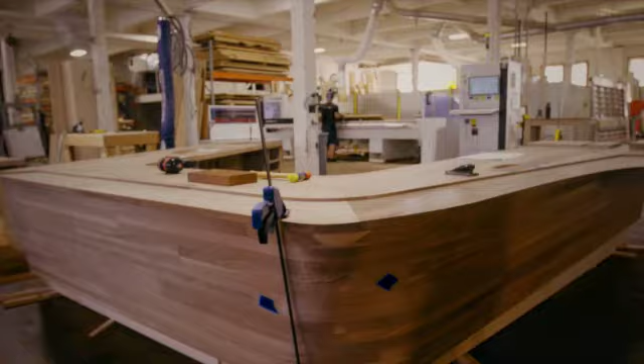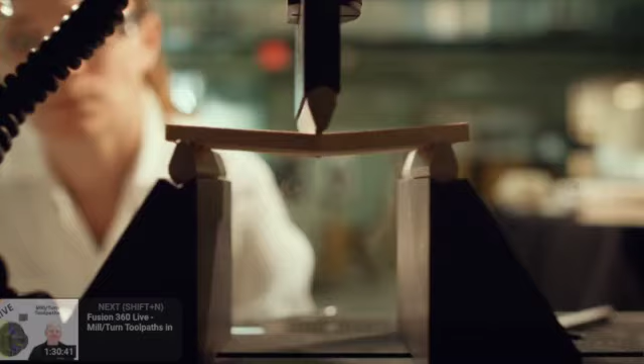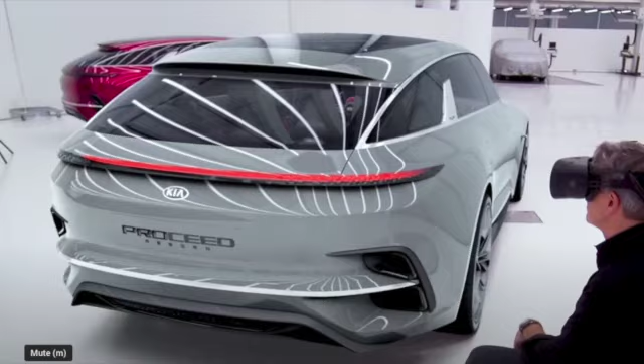This video is an overview, not a deep dive, of Fusion 360 tools, techniques and workflows you and your students can leverage to optimize their extended project work, to unleash their creativity and maximize their potential. This video assumes you've been a Fusion 360 user for a while and are confident using tools like Sketch, Extrude and even Render. If not, you are of course welcome to watch along, but there may be some foundations you need to shore up on before moving on.

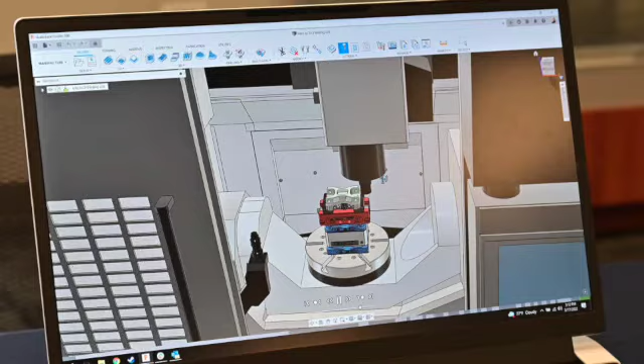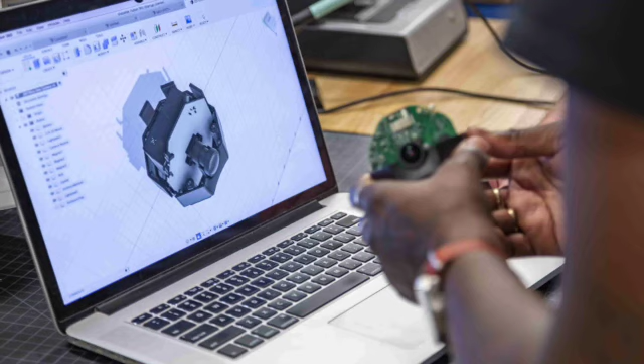While relatively new to business, students have always worked in a hybrid manner, splitting their time between home and school, network PCs and their personal devices. Fusion 360 is the first and only integrated CAD, CAM, CAE and PCB software platform of its kind. It's unique for educators because it connects the entire product development process into a single platform, meaning students don't need to download additional software and all the workflow they need is in one.

This video presumes you have experience of Fusion 360 and how to design parts, so let's do a deeper dive into the power of the platform to optimize and verify those parts so when students make them, they make them better.

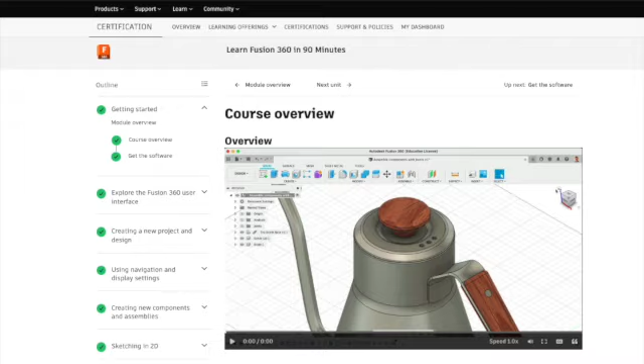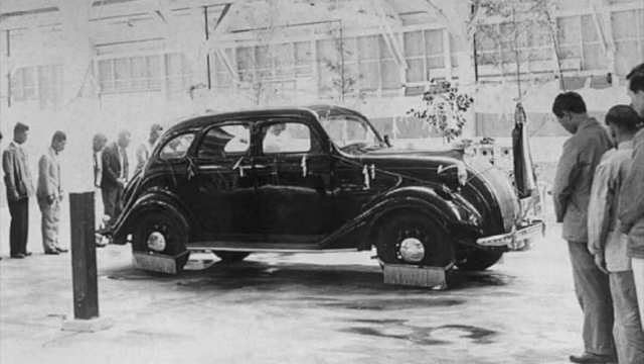So today we'll cover a 5-step approach to design using the lean manufacturing principle, which grew out of the famous Toyota production system. We can use Fusion 360 tools and workflows to reduce the wastage of time, materials and energy. The aim is for students to get it right first time. So let's dive into this example using this multi-tool design.

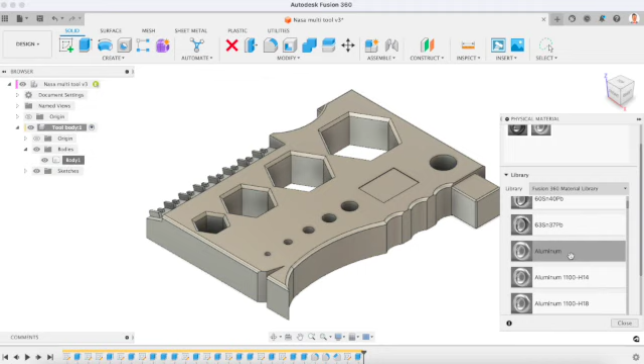First up, let's apply physical materials to a part and use the inspection tools to double check the part for dimensional accuracy, mass and balance properties. If those details are correct, we can export DXFs of sketches to print and cut out or even laser cut key 2D features. The aim is to physically prototype it fast.

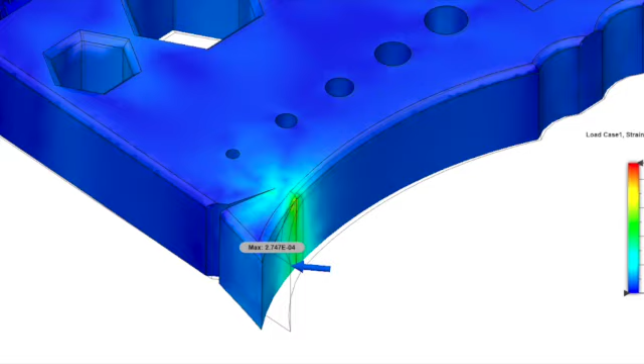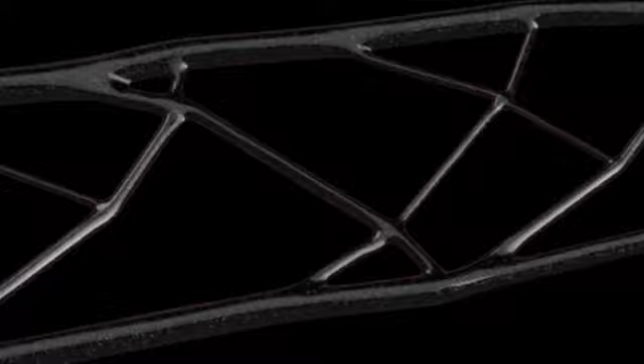If we are happy with the fit, we can simulate forces to explore how our part will respond under loading, and we can even use advanced tools like generative design and automated modelling as your personal design assistants. These advanced tools, however, require their own detailed workflows, so be sure to check out the links below.

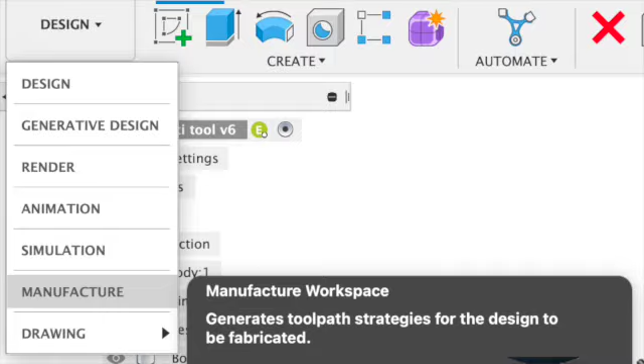At this stage, we should be pretty certain that the part we've designed is correct, so now we need to navigate moving from digital to 3D physical. To do this, we'll walk through, in much more detail, how to use the inbuilt additive manufacturing slicing capability found in the manufacturing tab. While 3D printing, or additive manufacturing, is a rapid prototyping technique, everything is relative. And if you have a class of 20 or more students wanting to fabricate every design, it can cause significant bottlenecks. So here's a workflow to tackle that issue.

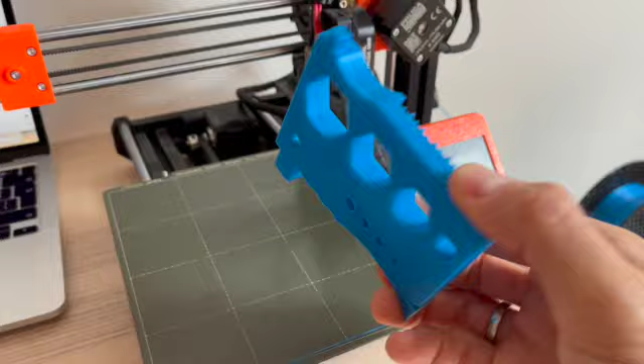Before I commit to 3D printing the whole multi-tool, there are 3 key features I want to isolate and test, as their dimensional accuracy and physical performance are vital. They are the polygon to hold the nut, the mini prying bar, and a precision measuring feature. You can see I've highlighted these in orange, and in this case they're all clustered towards the bottom of the part.

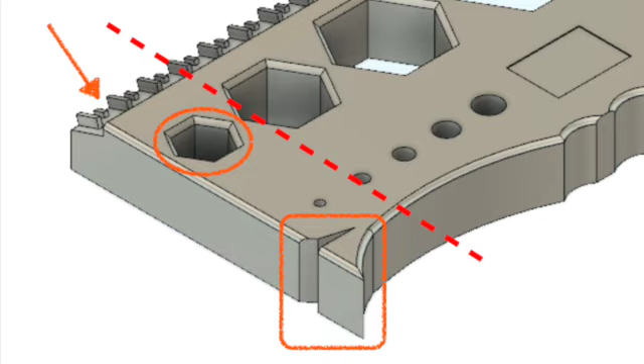To isolate them, I used the split body tool found in the modify menu. This creates a new body by dividing it through a plane, a face or a profile. Therefore, I created a new plane using an offset plane found in the construct menu. The result is that I now have 2 bodies.

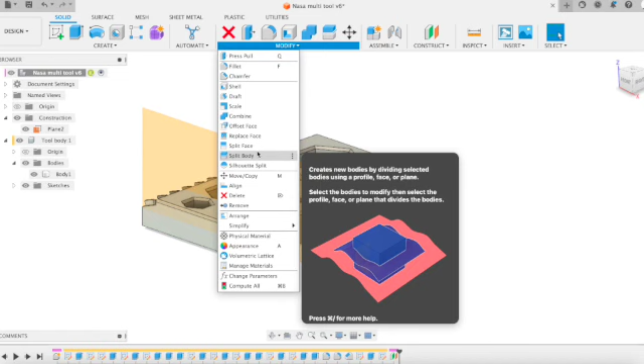I could of course make multiple splits to create many new features, each of which is something you need to test. But don't worry about ending up with lots of bodies. You can combine them again using the combine tool, which is also found in the modify menu.

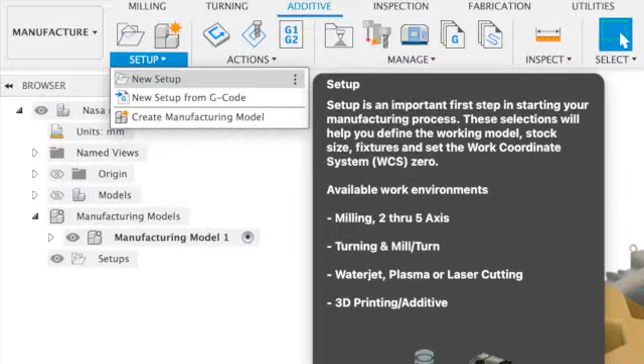Now it's time to move to the manufacture tab and create a new setup for your 3D printer. To do this, make sure you're in the additive section, then go to setup and new setup. In the setup dialog box under machine, press the select button and use the search box and filters to find your machine. In this case, mine is a Prusa Mini. Select it using the select button.

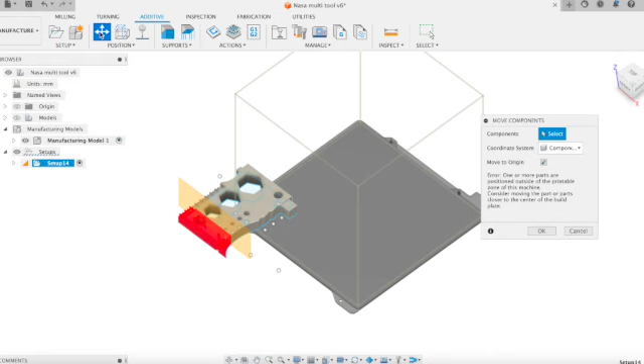Make sure you change the model selection from the component and instead select the body you wish to verify, then press OK. It'll ask you to select a setting. Choose one that's close to what you need, but you can edit it later. Then press select. Now you will see the build plate of your machine, and you'll have the option to move the part. You'll note that as you move it, all the component moves, but that's fine. Your setup is now complete.

You can now edit your printer settings by right-clicking on the setting you initially chose and selecting Edit. Here you can alter the infill, shells, speed, supports, adhesion, pretty much anything you could do in Cura, Prusa Slicer, or any other specialist software. But this is all within the same seamless platform.

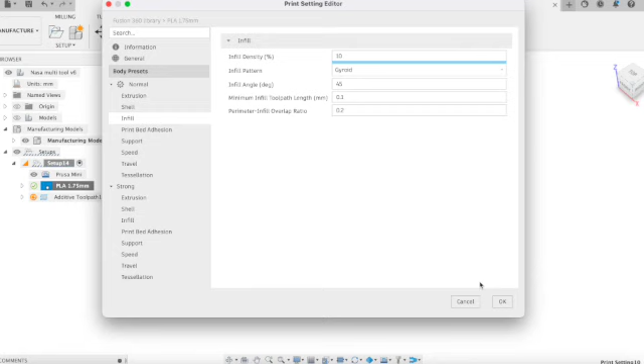You can then select Generate under the Action menu, and wait until the generation is complete, marked by a green tick. You'll then see the estimated print time. If you right-click, you can simulate the additive toolpath. You'll see it only simulates the body you had selected.

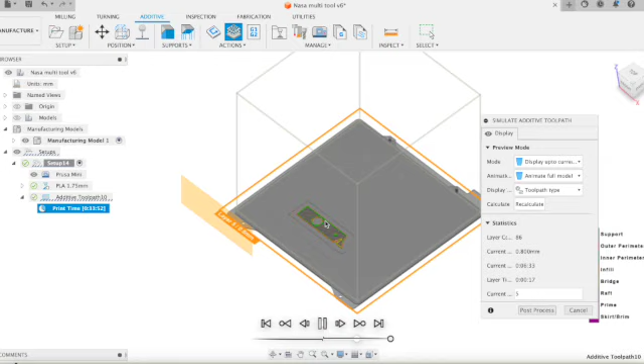Lastly, you can choose Post-Process and select how and where you would like the G-code to be sent to. I normally put mine straight on a USB drive to transfer it to the 3D printer.

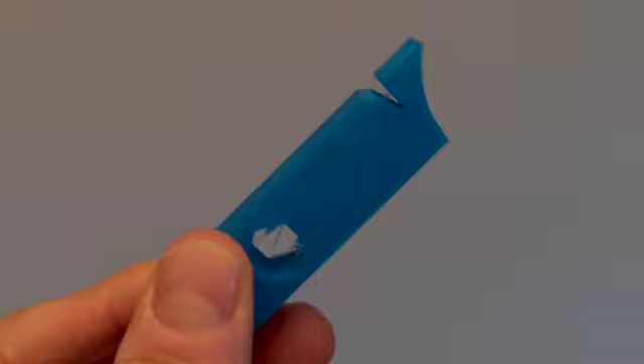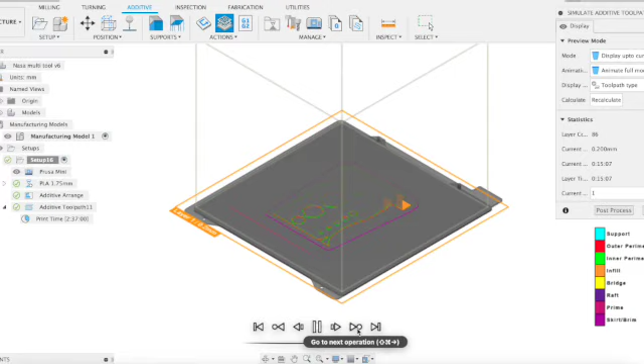So, to recap, in this video we looked at both a workflow and specific tools to create a lean process, all inside the unique cloud-based Fusion 360 platform. Students can quickly verify their work by applying physical materials and inspect the design for technical information like mass and surface area. They can export their sketches to quickly make physical 2D prototypes to test ergonomics and use the power of parametric design to make updates.

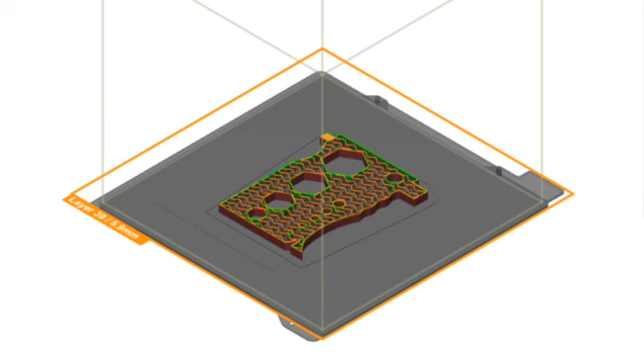They can then leverage industry-level simulation tools to identify issues with structural integrity and deploy tools like generative design and automated design to help develop their topology. And finally, we investigated how to leverage the integrated CAM capabilities found in the Manufacture tab, and we explored a workflow to simulate the efficient prototyping of whole parts and individual features.

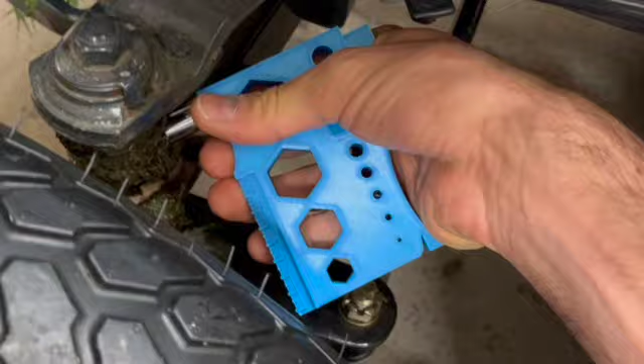This workflow has only scratched the surface of what Fusion 360 is capable of. So get your students to take a persona-based challenge and design, verify, optimise and make a multi-tool for a skateboarder, a VEX roboticist or even a NASA astronaut.

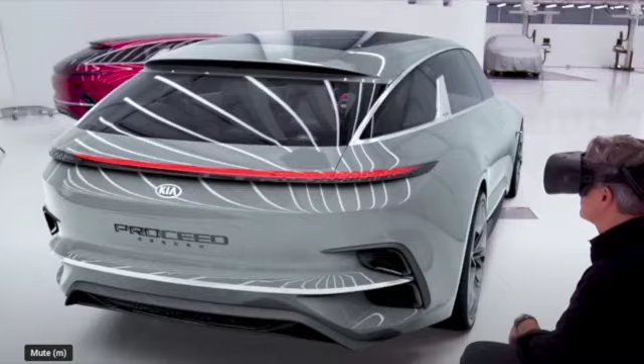In conclusion, Fusion 360 is a game changer for educators like you. It streamlines workflows, facilitates design review and feedback, and integrates seamlessly into your classroom. By incorporating Fusion 360 into your teaching toolkit, you'll empower your students to become skilled collaborators and innovators.